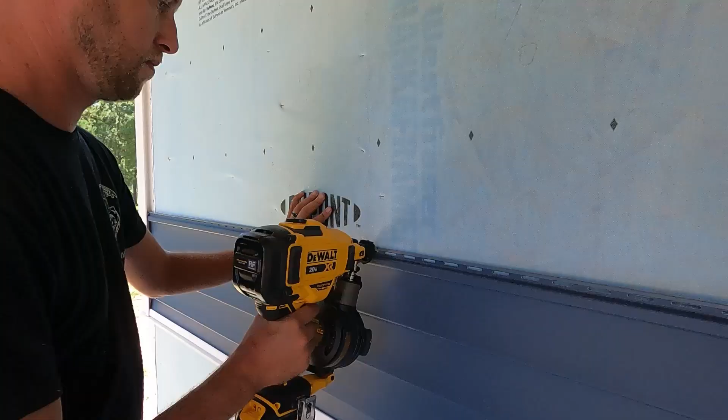Loaded up and ready to go.

Jackson, can you hear me? What week are we on? Week 24. And what are we doing this weekend? A little bit of everything. We do have the lift - they never came and picked that up, so that's kind of what we intended on. So we'll be able to get everything done that we needed to, and lots of other stuff. Our stone got delivered, but they didn't deliver the corners, so we can't start that.

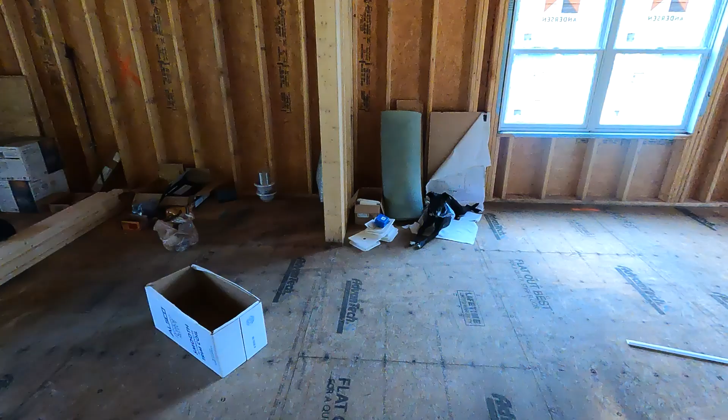Alright, well, I guess Jackson will just come. He's pouting. Oh, it looks like Jackson is checking the prints for us. Did you find a nice spot to lay? Where's your bed? You know you have a bed in here now.

Alright, you want to grab the print? Yeah, I know - you're supposed to give me a job. Well, you did give me a job. It's putting in junction boxes. All the junction boxes. So I'll be done next week. No, this is an easy job, right? Yeah, pretty much. What do we do?

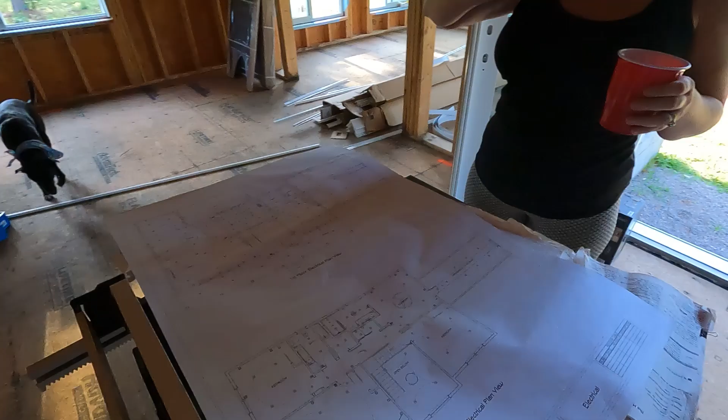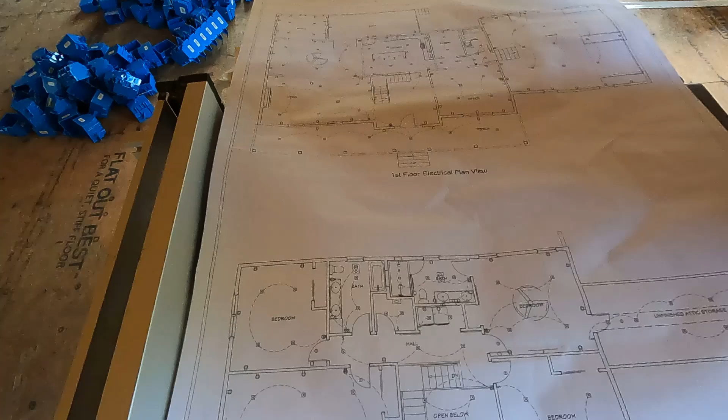Alright, let's come over here to the electrical plan. Now if you see on the plans, everywhere that has a symbol like that gets junction boxes. Well, how do I put them in? With a hammer. Okay, and then also you'll see symbols like that, like the dollar sign. Monies? Yeah, is that where we're hiding the... That's where switches go. So that gets a junction box as well, but that's a different height. Oh, okay, so right now we're going to focus on all of these.

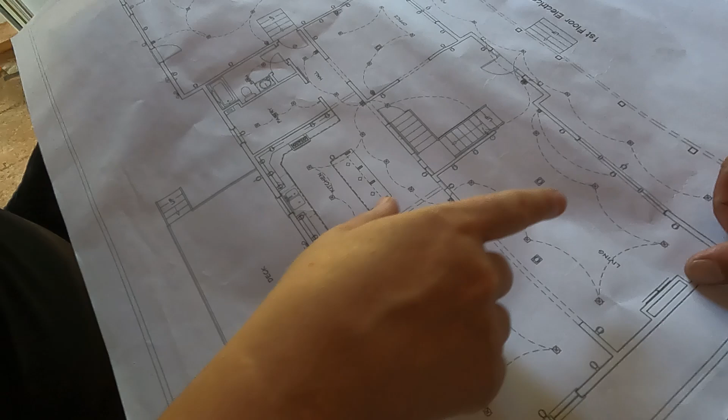That's different. Oh, no, it's not - so all the tables in the corners and... So how do I know which one's the doubles and the singles? See how this one has like 2 lines through it that way, like a tic-tac-toe or hashtag? And this one doesn't - that's a single. And that's a double.

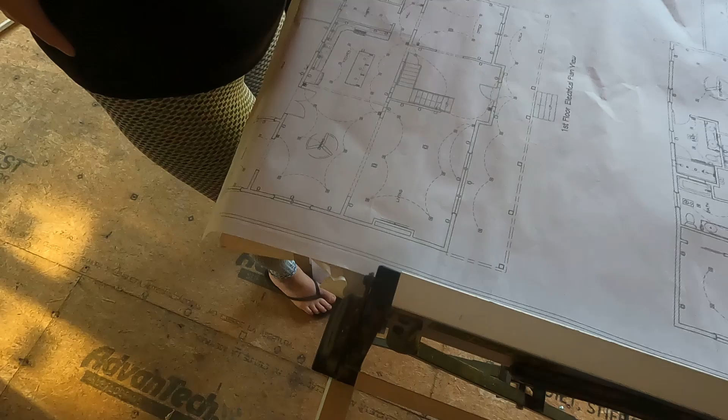Alright, so now that the house is built and you can kind of visualize more where you want things, you can kind of just put ones wherever you think we want one. I'm just gonna go off of this, but how do I know how high up they go? You can use your hammer. Where's your hammer?

Over there? Well... It's a hammer, not my hammer.

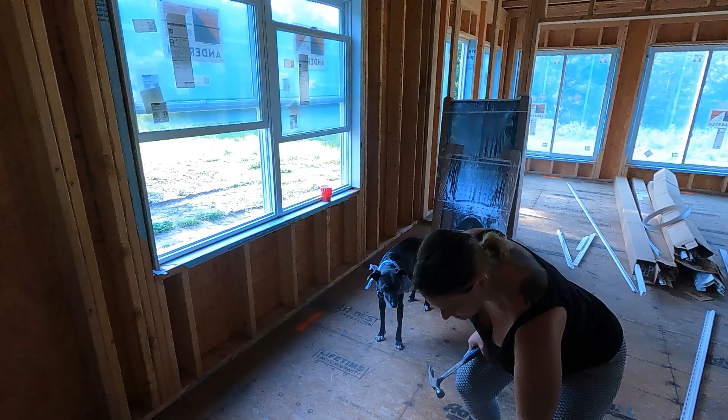Alright, so we'll start here. Grab a junction box. Do you want a single there? Probably, that's what I figured on. A single? Yeah, you don't need to plug 4 things in at once there, right? Nope, I don't think so. So this one's going to be kind of set under the middle. You want to show them how you figured out the heights for the... Just use your hammer.

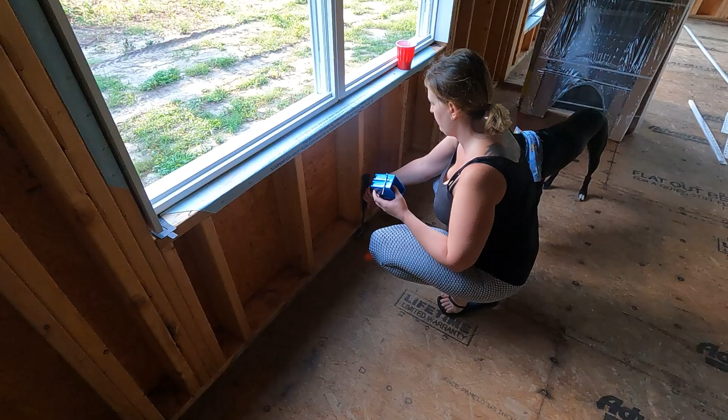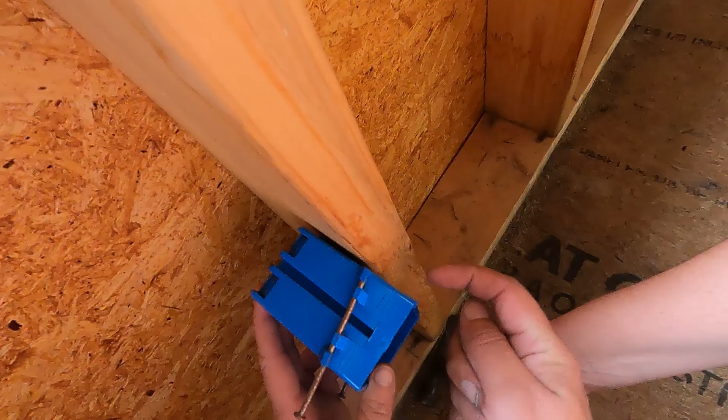Set it there. Now, do I want it to go the whole way back, or does it need to stick out? No, there's these little nubs that go right on the front of there that spaces it out for the drywall. So then you just hammer these in.

Yeah, but you're too low. No, I'm doing it. You're not sitting on top of the hammer, are you? Yeah, oh well I was. Okay. So should I hammer it in? Yep.

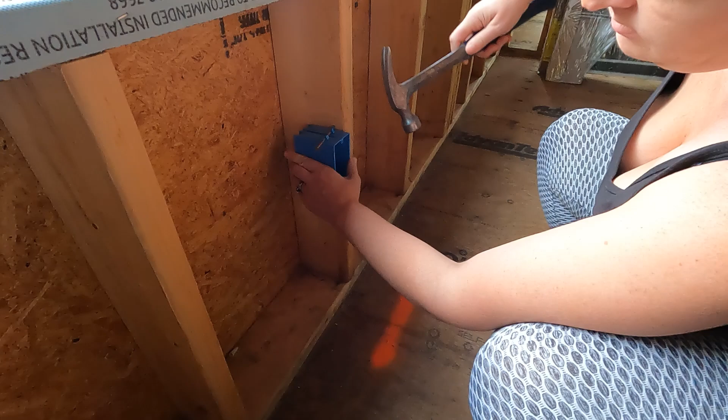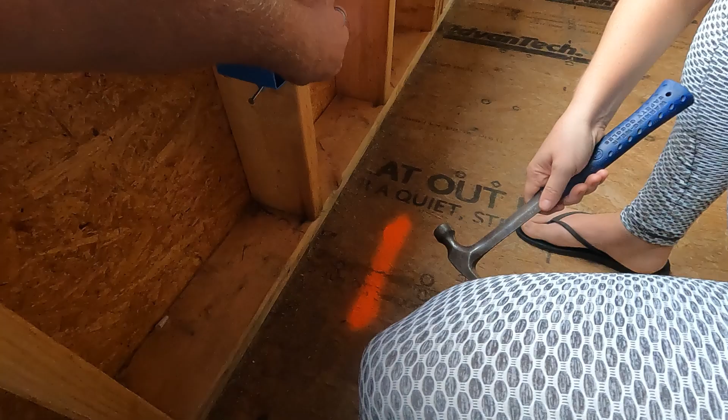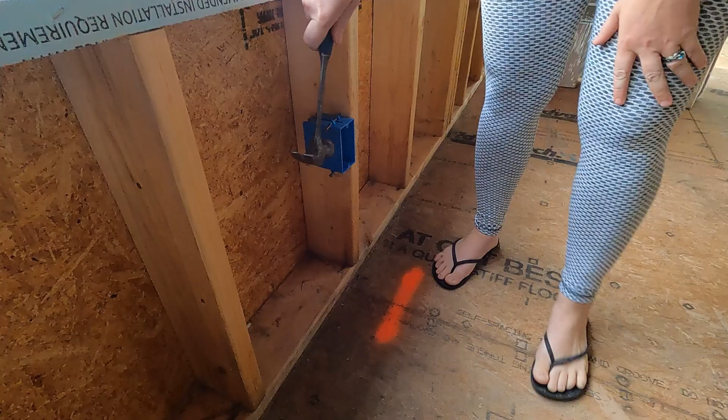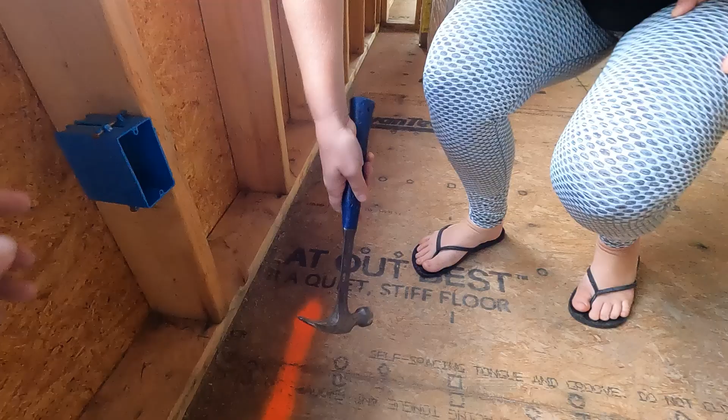So once it's held, I can let it go, right? But just watch that you have the right spacing - you don't want it too far out or too far back. And then once I'm in, I can just do this. How far, is that good? Yep. Just run it tight. Oh, a little more. So perfect.

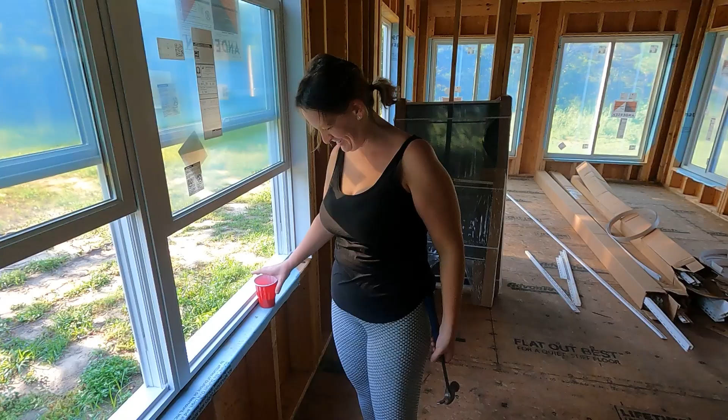Now we're just going to lay them all in place where they go, so then you can go around and nail them in. Okay, so I think the easiest thing to do is get the print and walk around, and you tell me what I need, and then I'll just lay them, and then I can go back.

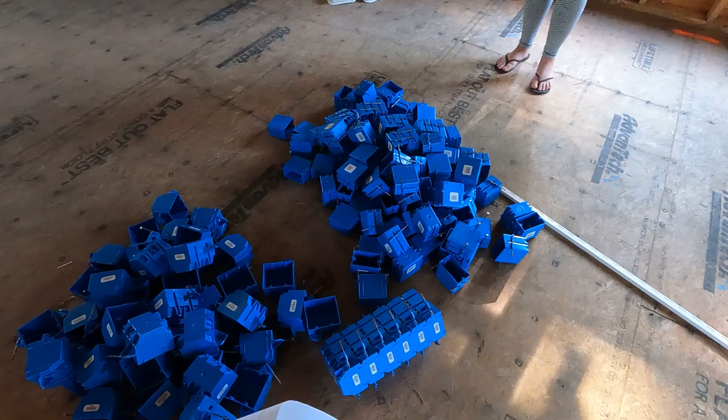Where do the triples go? There's the print. Triples are for light switches. Okay, so I think like over by the front door is gonna get a 3-gang for light switches, so we'll start with that. So you just stand where they go and tell me what I need.

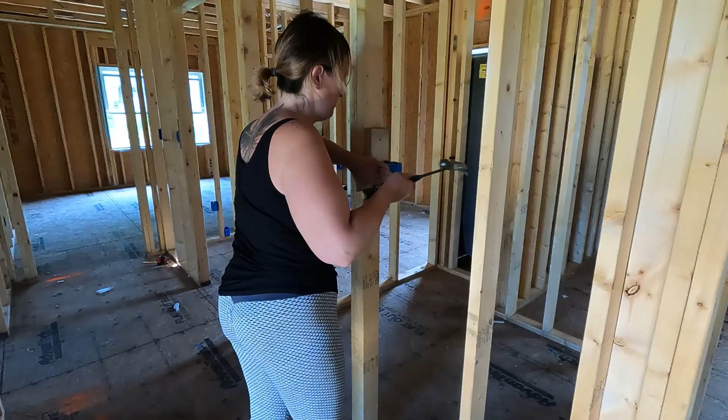Bathrooms we can't do. I think we got it. We're gonna do your office and we gotta do downstairs. Go. All right.

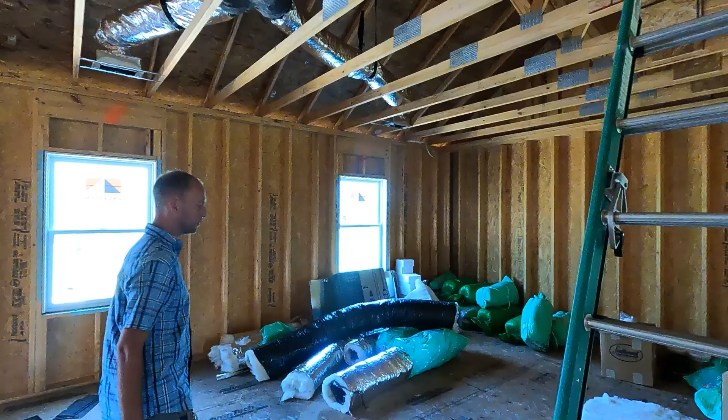Your office has all the outlets, so well, the HVAC guys have a mess in here right now. Yeah. I have some laid out a while.

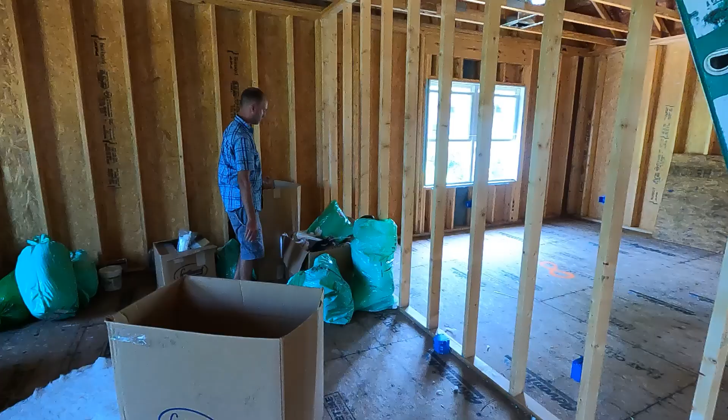So this is like your recording studio. Yep, so. Now, didn't you say that's not outlets, those ones? No, these are going to be for XLR and Cat 6. So I'm going to stick these in where I need them, then paint them orange or something so they're not mixed up, and then come back and stick the outlets in. Okay.

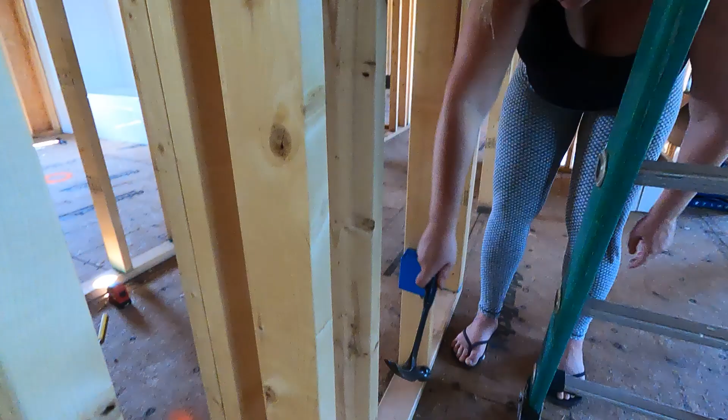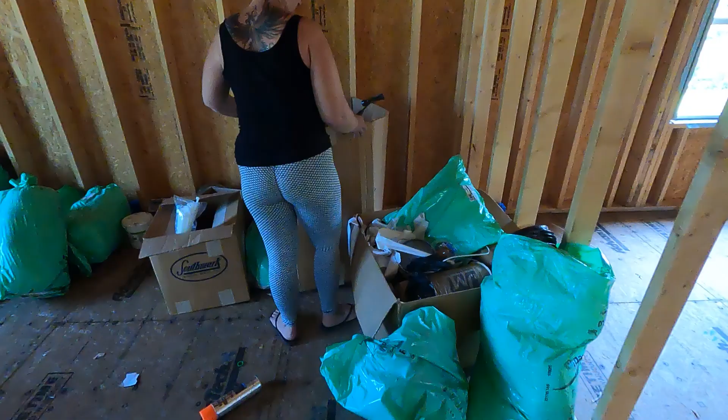So you're not putting any outlets? Yeah, I will be. I need to get these placed. These are slightly more critical for placement than the outlets. So this one you want on this side? Yeah.

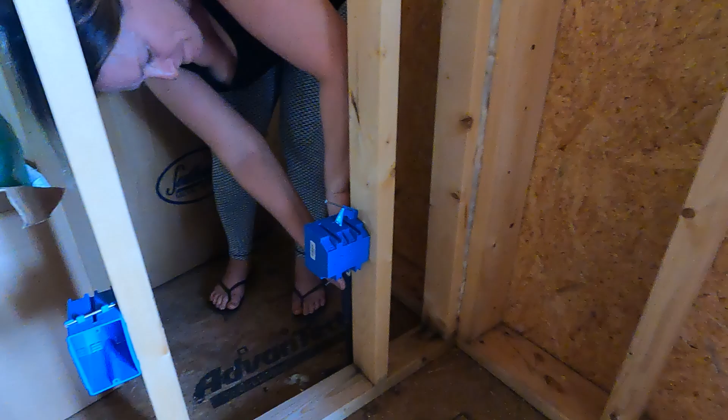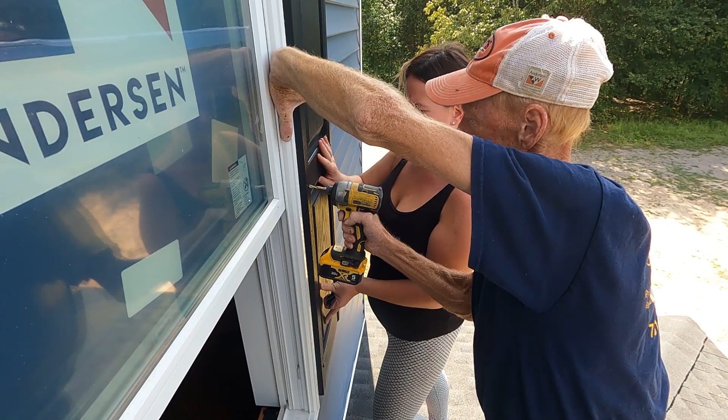Next. And just put the screw in there? Do you just hand do it? Oh, really? Well, you push it, man. Yeah, you're in it there. You can use a hammer there, right there. Do we have one? There's one behind Shaun. She's got it. Just gotta put some. That's it. All right.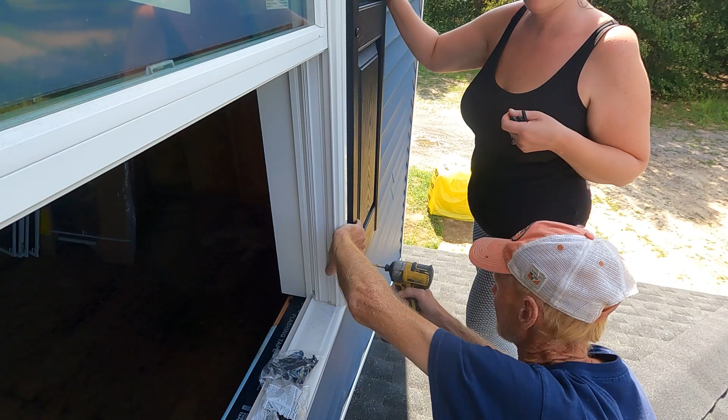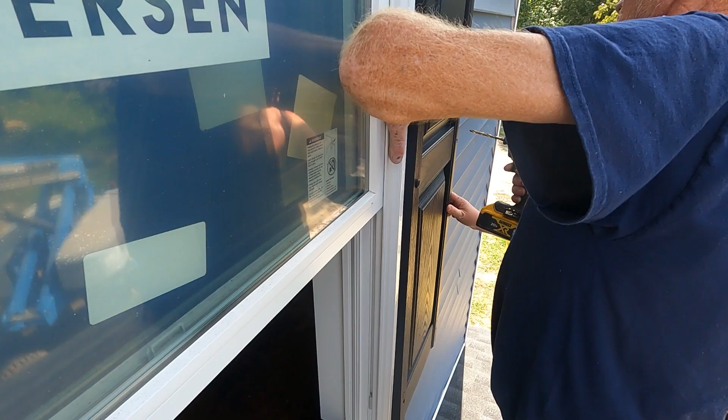A little tricky because they're landing right on that rib. Yeah, so you got to push it in there and find that before you push it in hard. Okay, there's some extra. Do want that hammer. But get them started first before you hammer it. You might have to pull the shutter out a little so you can see behind it to get it started.

Yeah, and don't over tighten them or they'll get pulled in. Yep. Oh, I should have done this one first. Yeah, I have to look, pulled it out a little and look behind it. There we go, at least they're flexible.

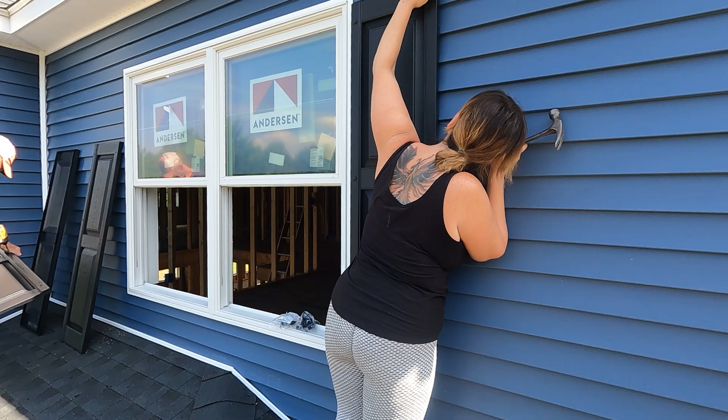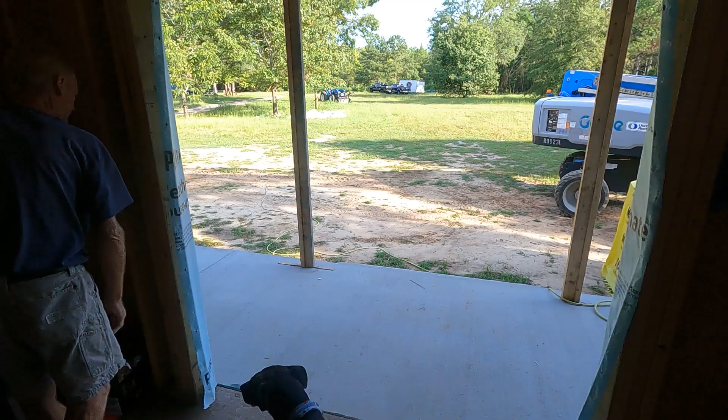We're prepping for front door installation. Let's see here. That's a better picture.

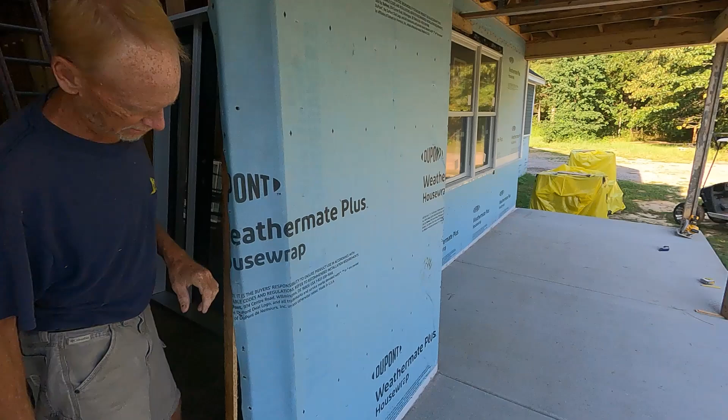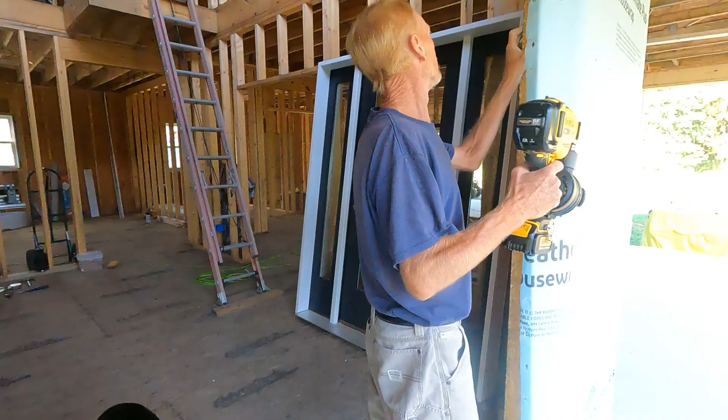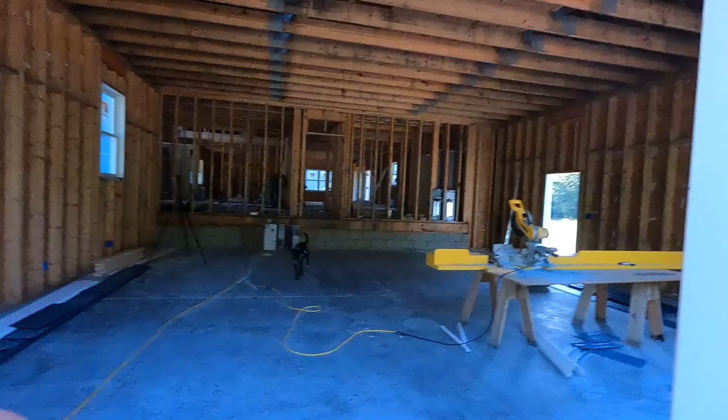So we got all of the junction boxes and light switches, all that good stuff put in yesterday. I'll have to show you Shaun's office, oh my gosh. I don't think he could fit another one on there if he tried to. What are you working on? Putting these lights up.

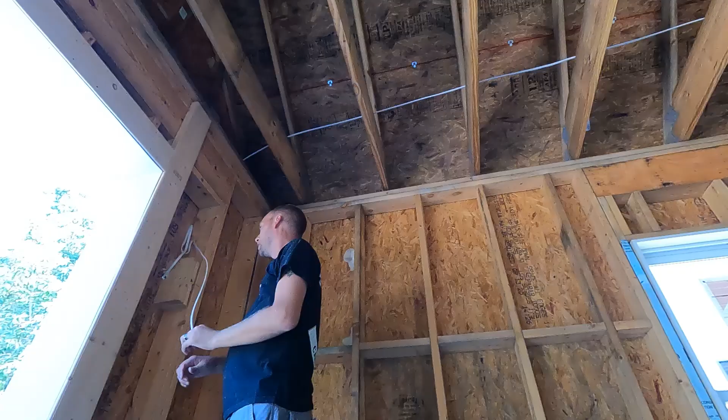We ran the wire across for these lights and then over to the front porch. I think we're going to have them all on that same switch. I think I want to put in a smart switch so we can maybe set it on a schedule, that way we can just have them on dusk to dawn or be able to turn them on whenever we want.

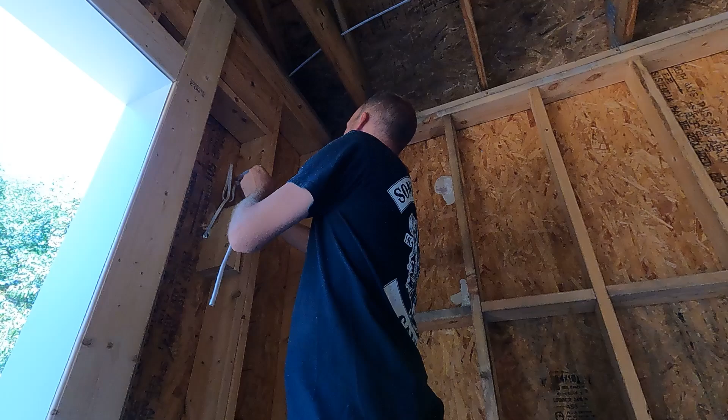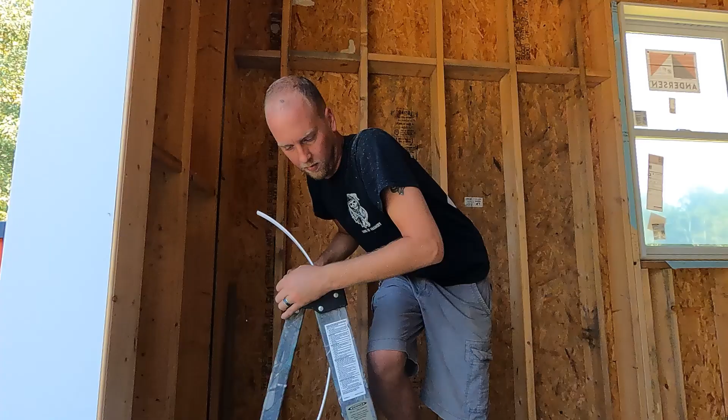Have to try out my new drill bits. And I already ruined both of them, I think. How so? Hitting nails. Twisted the shank on my good one, and the long one was kind of dull right out of the box.

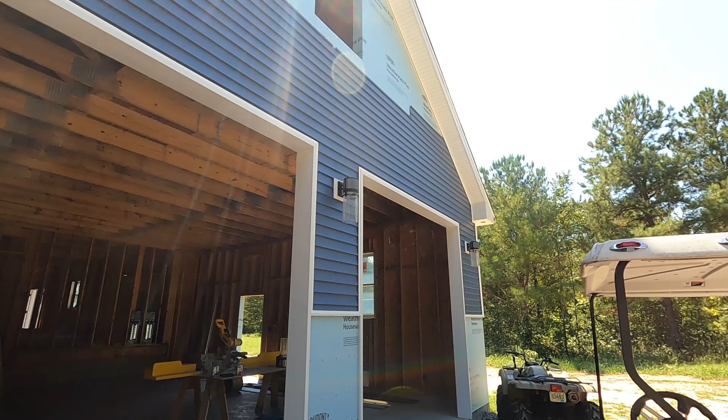So in addition to everything else you know how to do, well I guess we already know you know how to do electricity. Rewired half the shop. Yeah, I forgot about that. That was like totally week 16 or something. Actually it was probably like week 6. I only really remember because of the whew.

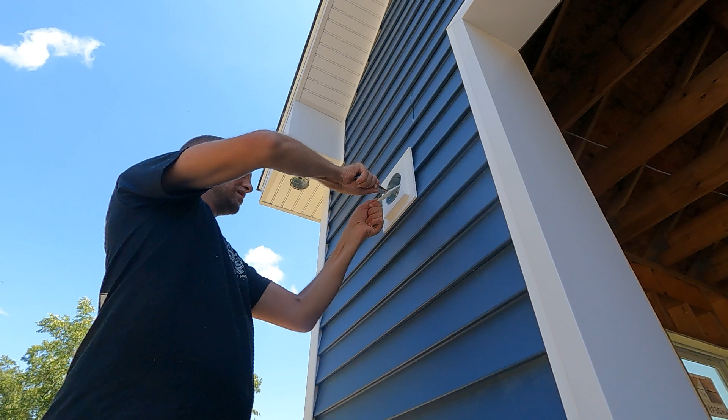She likes my reaction when things arc. That's how electricians do—when you're done with it, you just throw it on the ground.

Oh, my wire cutters, where'd you put them? Probably on this ladder.

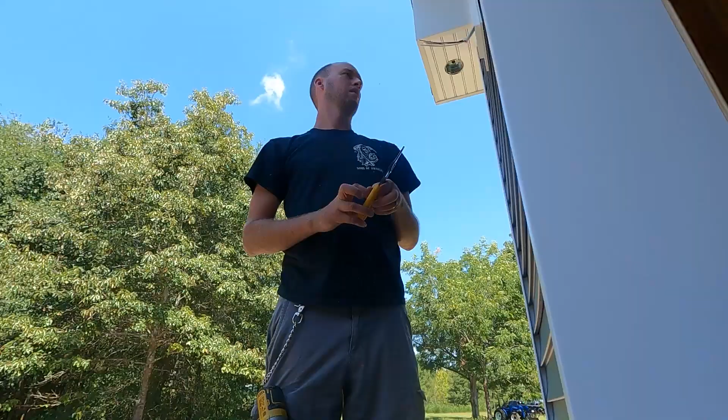So blacks are grounds? No, blacks are hot. Oh. White's neutral and the bare one's ground. Oh okay, well never mind, you're making all of them bare. When I watched you do the last one, I saw they were that color, that's why I thought that. Good thing I'm not an electrician.

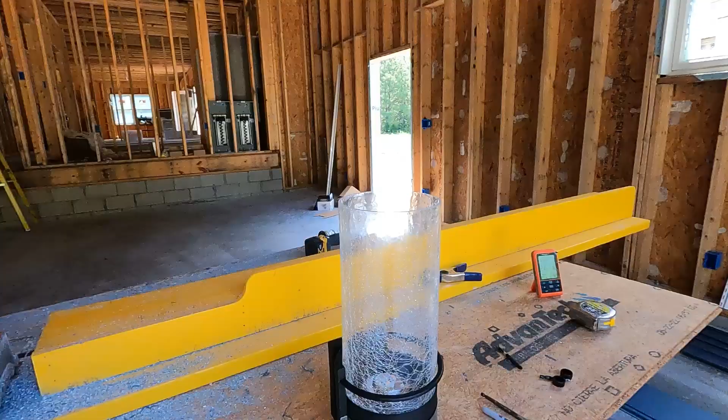Light number 3 of 3. Super pretty.

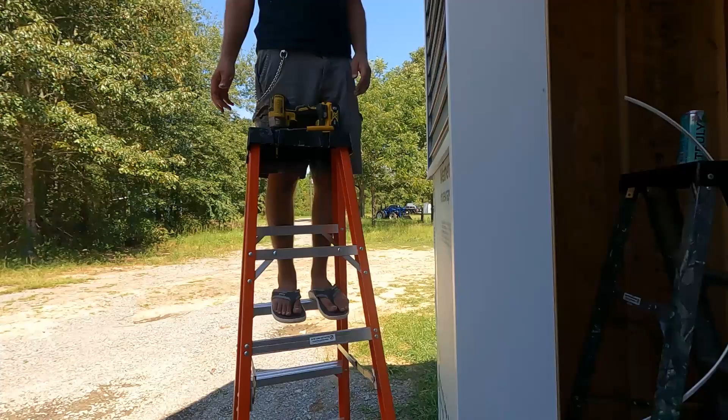I like the push-in wire connectors better, but I don't think they're good to use with the braided wire that's on the lights. How come? Well, first of all, it's hard to push it in, and second of all, I don't know if it would make a good connection.

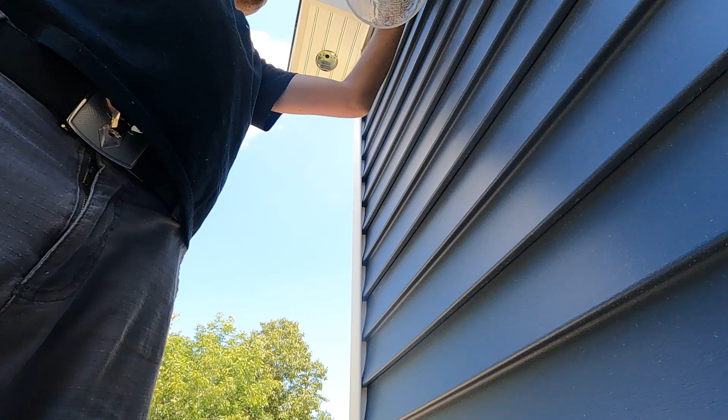I think they look so funny without light bulbs, since all of these are LEDs. It's just like an empty canister that will eventually light up.

How was that? Beautiful.

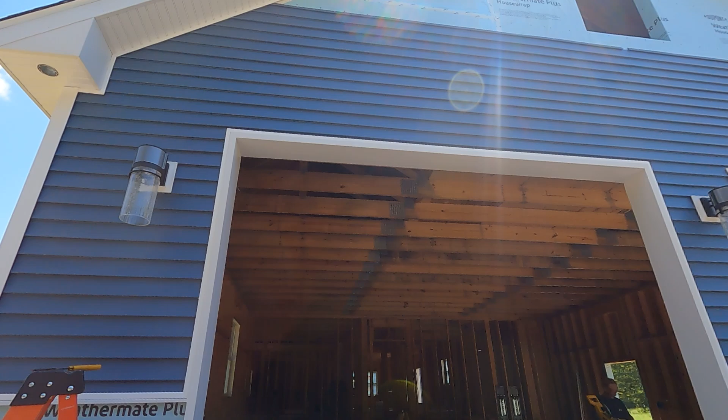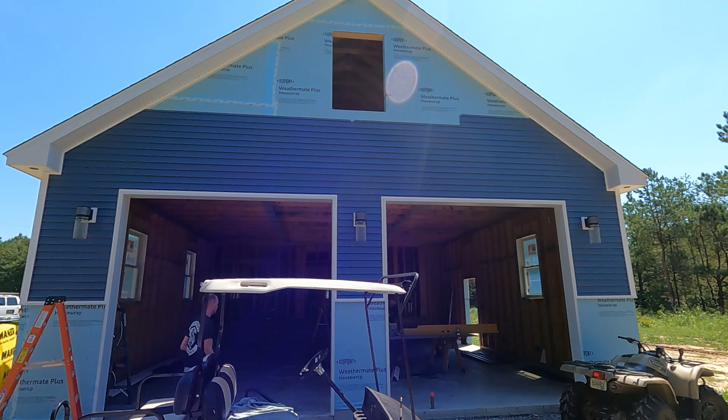And we have garage lights.

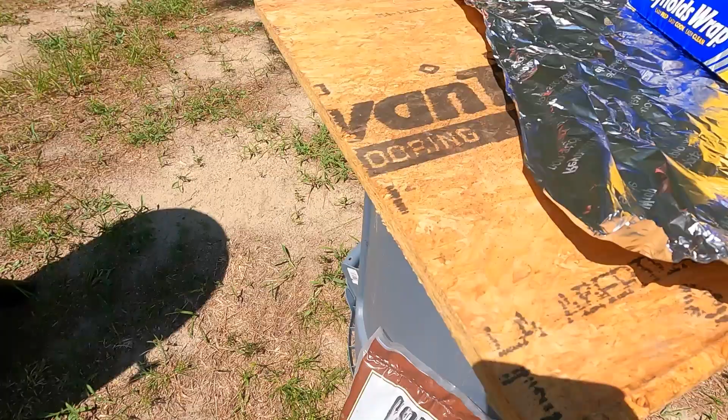Meanwhile, over at the shop, we had some ribs in the smoker. We figured we'd try something a little bit different this time. We got the mesquite wood and the Sweet Preacher Sweet Southern Pork Rub.

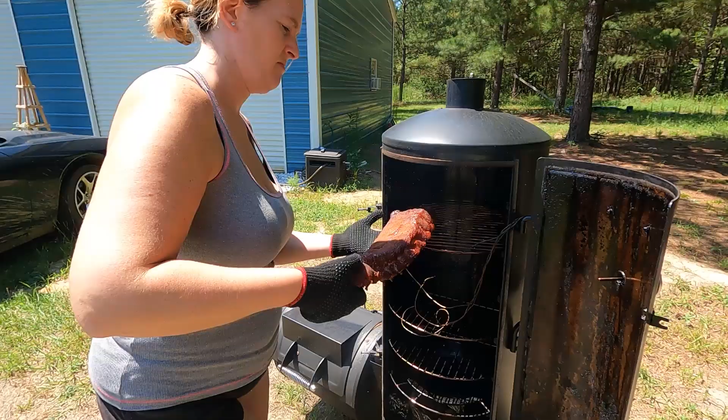At a brisk 2:46, it's time to wrap. How much of it? That's probably good. Sorry, my OCD wanted me to cover it. And back into the smoker.

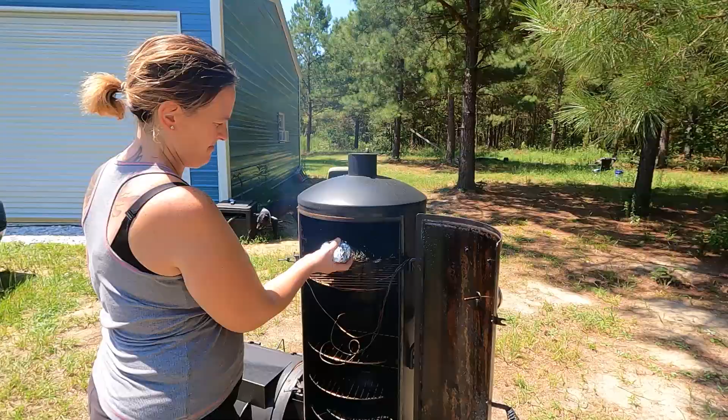Now I need some vodka or something to mix with the rest of this. Hey, no libations when you're working on the house.

All right, so 2 hours, what time is it? Noon-ish, about 2 o'clock.

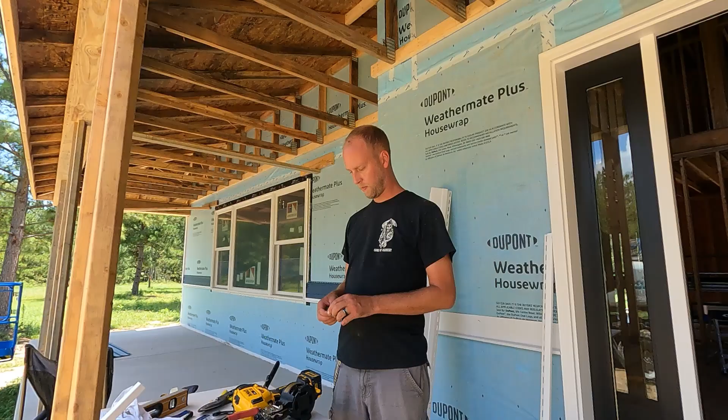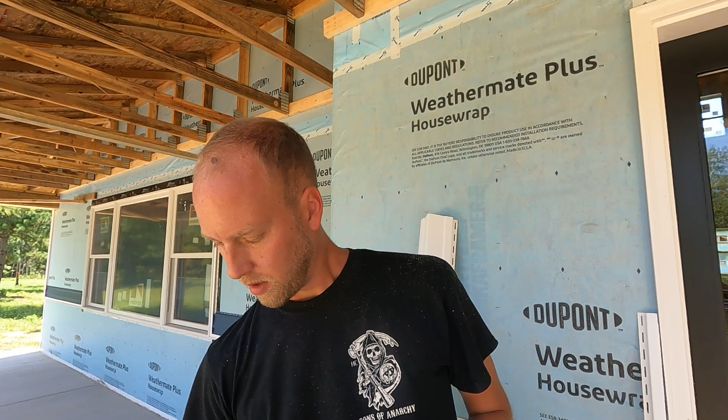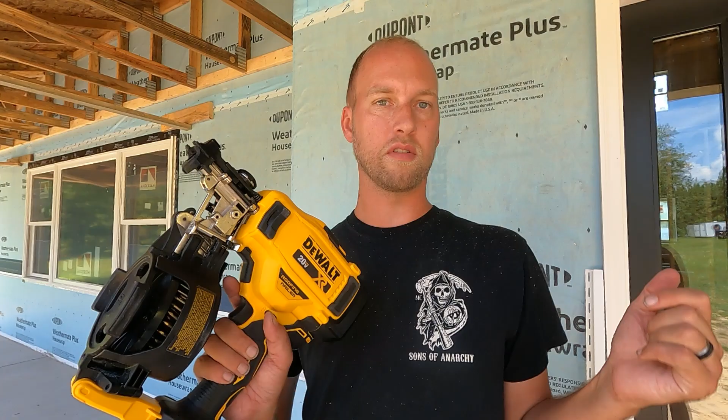So we didn't get to demonstrate this yet, but we got these siding adapter tips we ordered. Somebody in Canada makes them. The yellow one is for nailing on vertical siding, and the black one is for horizontal siding. They just sit right on the end of the DeWalt roof nailer, and they line up with the grooves of the siding, keeping the nail from shooting in all the way so it stays proud and the siding can move back and forth when it expands. And I'll show you how it works.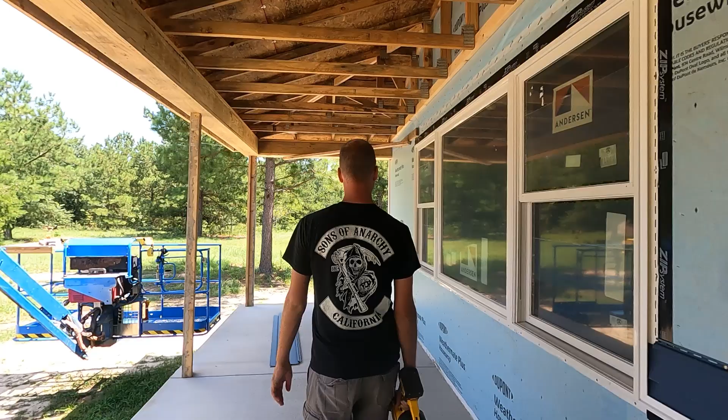It's a 3D printed piece, right? Yeah, so I believe it's also patent pending.

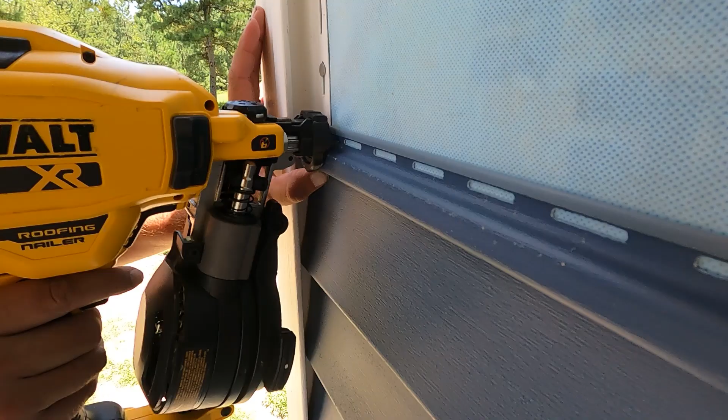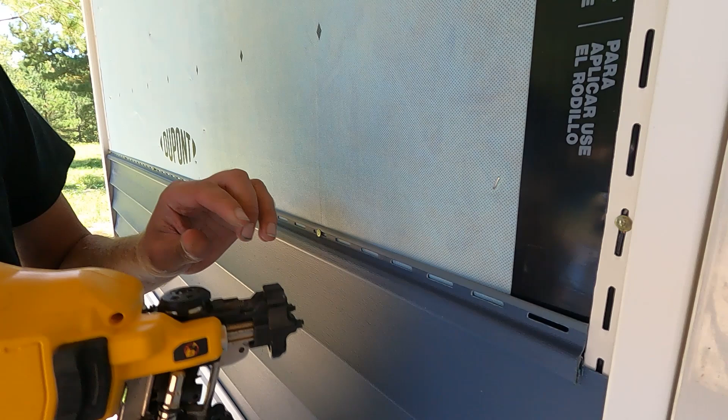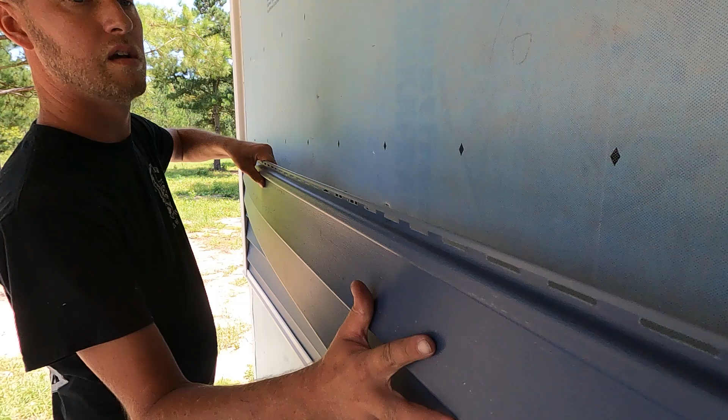One over here. It stays. And you can slide it back and forth or no? Yep. There's little things to help save time and effort. But sometimes that happens.

Time for the BBQ tube. Sweet and spicy.

Oh, I love the way you glaze my meat. All right, now it's back in the smoker for one more hour.

If you don't clink your tongs a few times, are you really even barbecuing?

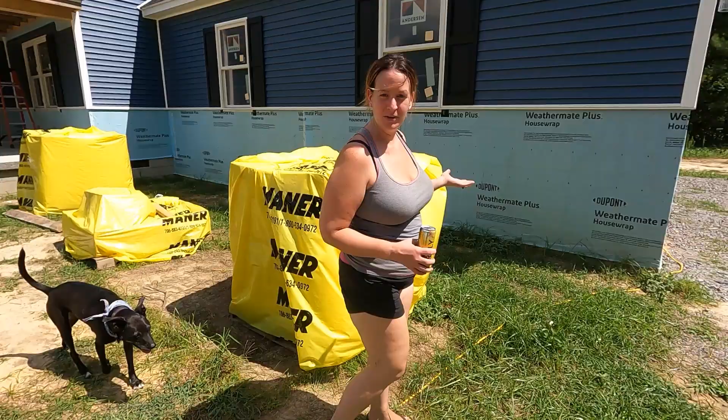So as you can see, we only put siding on half of the house because the bottom portion is going to be stone. This is what I'm looking forward to. I think it'll be a fun job, but our stone was delivered this week, everything except the corners, so we can't get started until that gets here. But here's a sneak peek at the color.

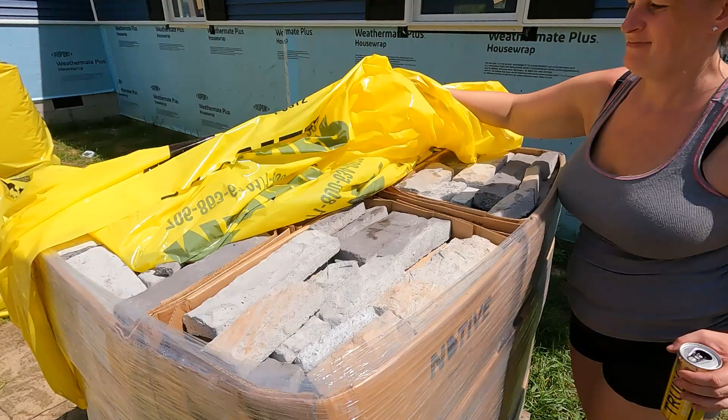It's brown. No, it's yellow, silly. Can't you see? You can see there's a little bit of natural reds in there, some darks and light colors. So this will all eventually be on the bottom portion of the house. Exciting things.

It's been a long 2 months, and boy has Genie been the best help. We are forever appreciative of all the stuff it's helped us finish. But unfortunately, all good things come to an end, and we have no use for this after this weekend. So anyway, Genie, it's been real. Let's say goodbye to her. Send her away.

Wrapping up week 24. We got most of the siding on, at least what we could, without having the window that was busted, and the other window they were waiting to put in until we get the drywall for the second floor, shoved through it so it doesn't get ruined. We got the front door put in, the lights beside the garage doors, all the junction boxes in the house. I got the shingles put on the porch roof. We got the shutters put on. What else?